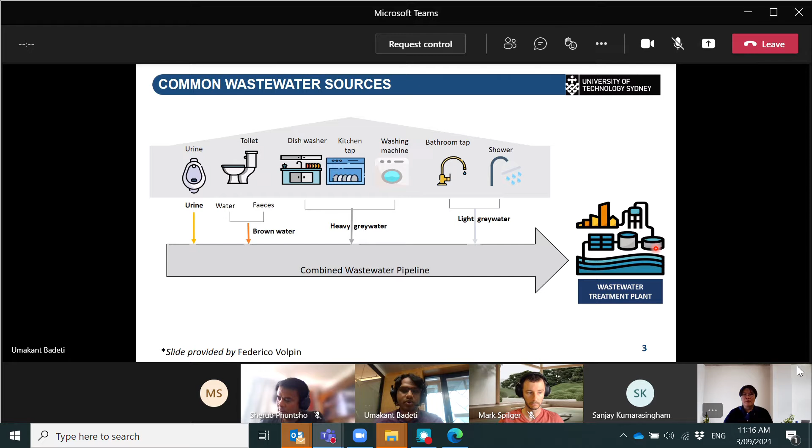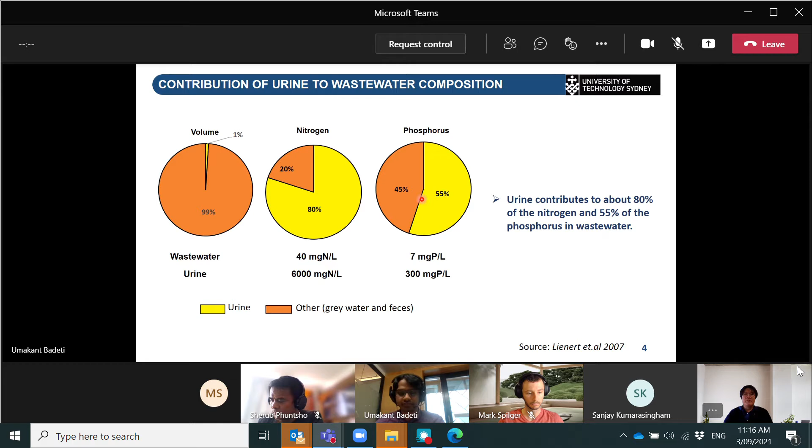When we look at the composition of wastewater, urine contributes about 1% of the whole wastewater volume. But this 1% of the volume contributes about 80% of the nitrogen and about 55% of the phosphorus in wastewater. In a traditional flow like Central Park, all these nutrients are carried to the wastewater treatment plant. The general treatment targets of the plant are to remove nitrogen, phosphorus, organics, and pathogens. However, some of the challenging parts of this process are nitrogen and phosphorus removal.

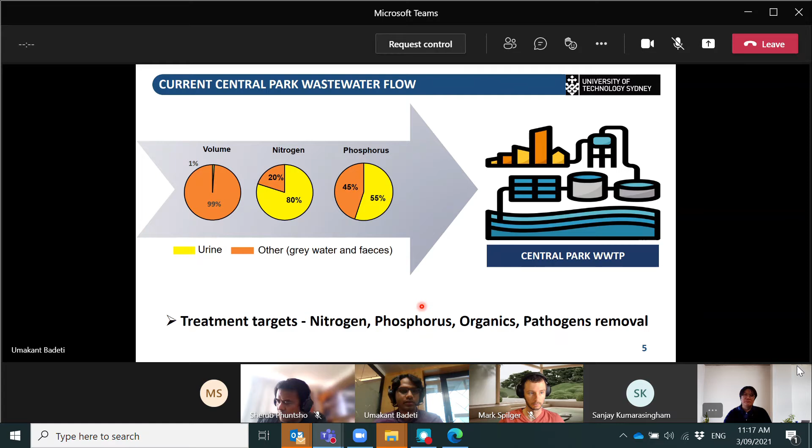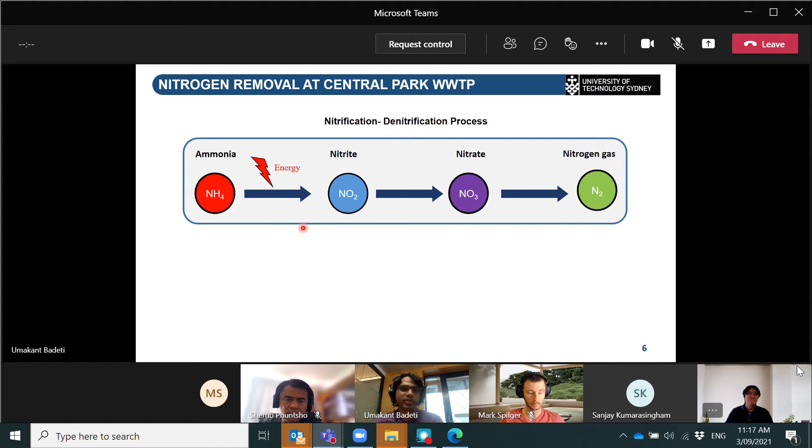At Central Park, nitrogen removal is carried out by nitrification and denitrification processes, where ammonia in the wastewater is nitrified to nitrite and nitrate, and then denitrified in the form of nitrogen gas. This process requires energy-intensive aeration, which consumes about 40 to 60% of total energy consumption. It also requires recirculation, which increases the space requirement of the plant. At the same time, it produces harmful greenhouse gas emissions like nitrous oxide.

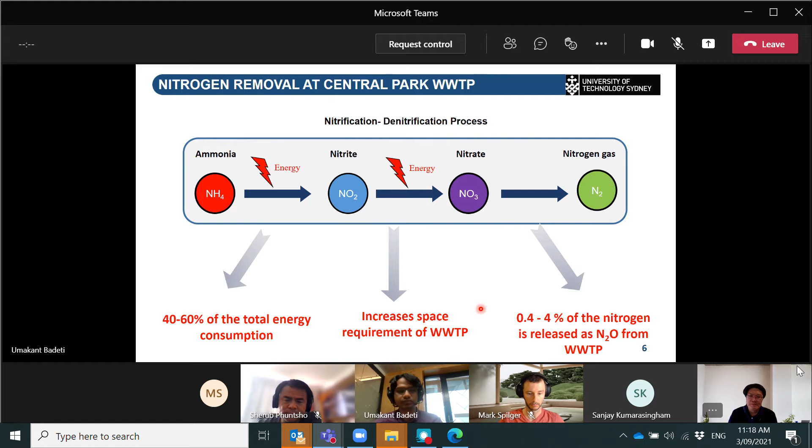Phosphorus removal at Central Park is carried out by chemical precipitation by alum dosing, which requires alum as a chemical input. According to my calculation, about $31,000 per year is spent just purchasing the chemicals for this process. The precipitated phosphorus is discharged to the Sydney Water sewage pipeline, which charges $6.7 per kilogram of phosphorus discharged. My estimates show that about $40,000 is spent on phosphorus discharge every year.

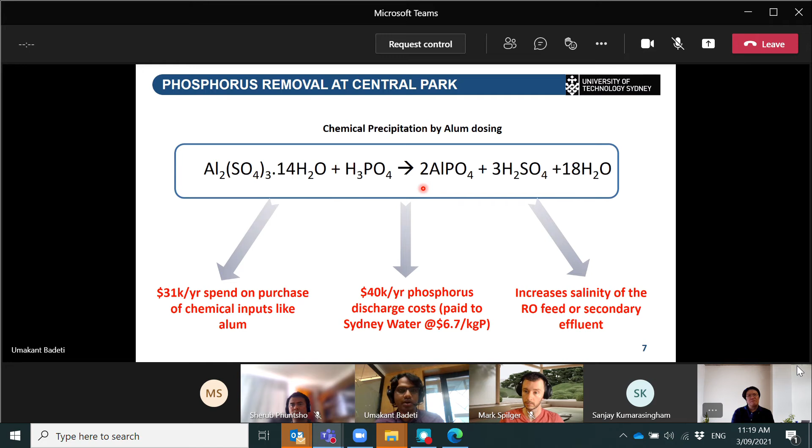Another challenge is that alum dosing increases the salinity of wastewater, which at a later stage impacts the performance of RO. So one way to address this that we are proposing is urine diversion, where at the source you remove a major part of nitrogen and phosphorus from wastewater, which can lead us towards sustainability.

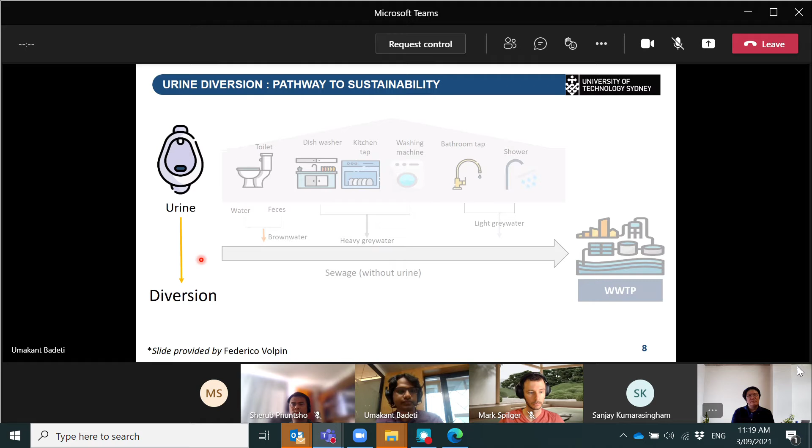We have proven at UTS that urine diversion is possible from male urinals. At UTS, we have a plumbing system which diverts urine from all the male toilets. A common pipeline takes all the male urine to the basement, and this urine is processed to be used as a fertilizer.

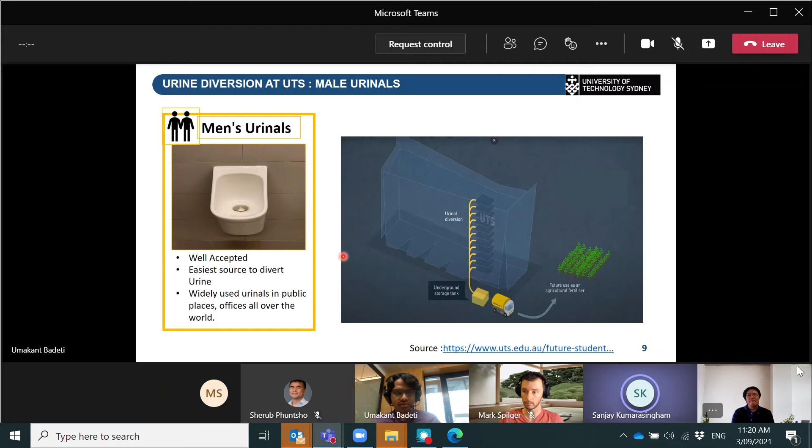Sorry, my presentation is stuck for some time. Okay, so

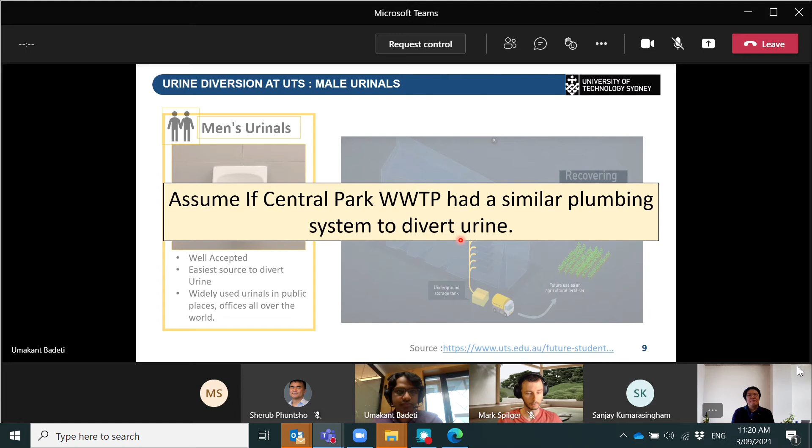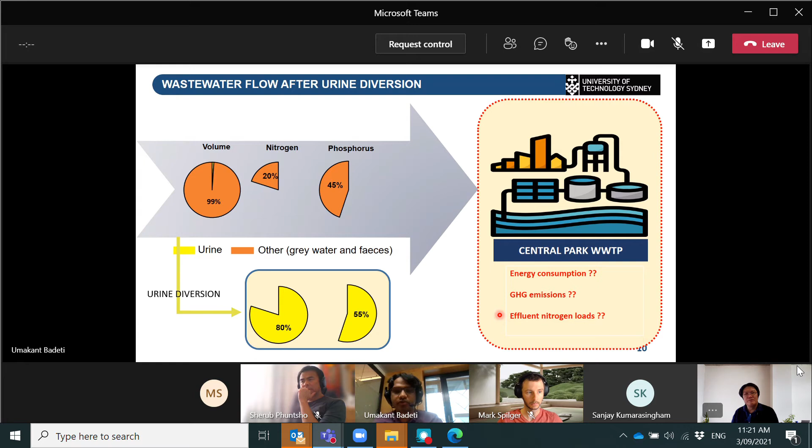Assume Central Park wastewater treatment plant had a similar plumbing system which could divert urine. We would remove a major part of nitrogen and phosphorus from wastewater, which is expected to significantly influence process performances of the plant, like energy consumption, greenhouse gas emissions, and effluent nitrogen loads. My work is focused on modeling this scenario and understanding how it can impact the performance of Central Park wastewater treatment plant.

We have carried out this work on BioWin modeling software, which is used by most water utilities in Australia to optimize treatment and study various treatment processes. Our model input was the Central Park wastewater treatment plant process. We configured it in BioWin, calibrated and validated the model, and the outputs were energy consumption, effluent water quality, and greenhouse gas emissions.

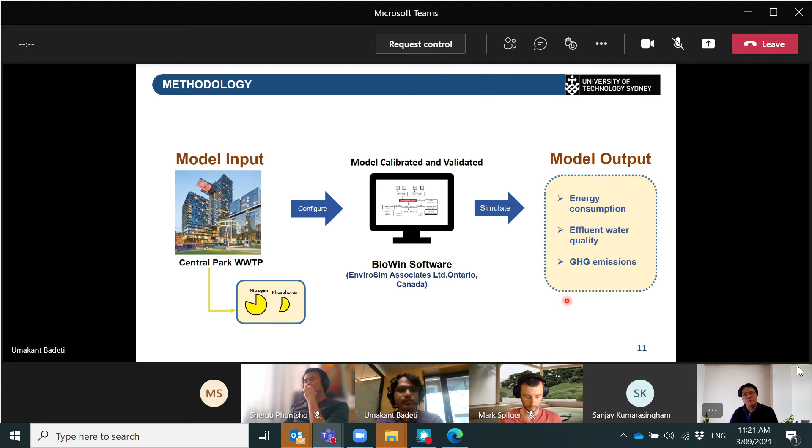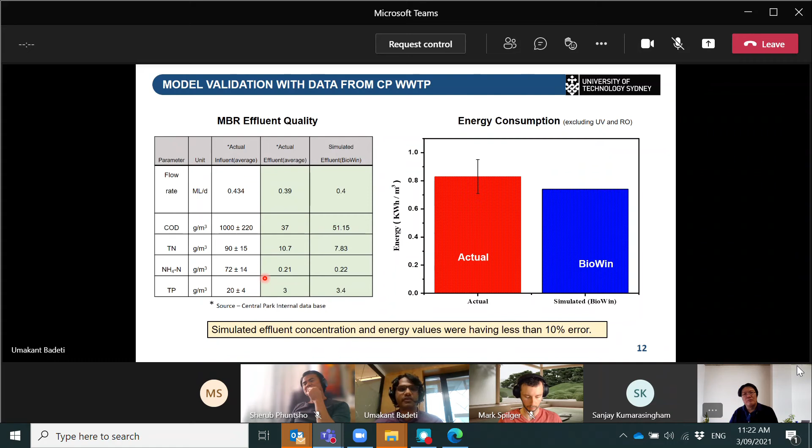First, we validated our model with real data from Central Park on effluent quality and energy consumption, and the modeling and real data were within less than 10% error. Our modeling studies revealed that by diverting about 90% of the urine, you can save up to 33% of your energy consumption, because you're not letting most of the nitrogen into the treatment plant, which saves a lot of aeration energy.

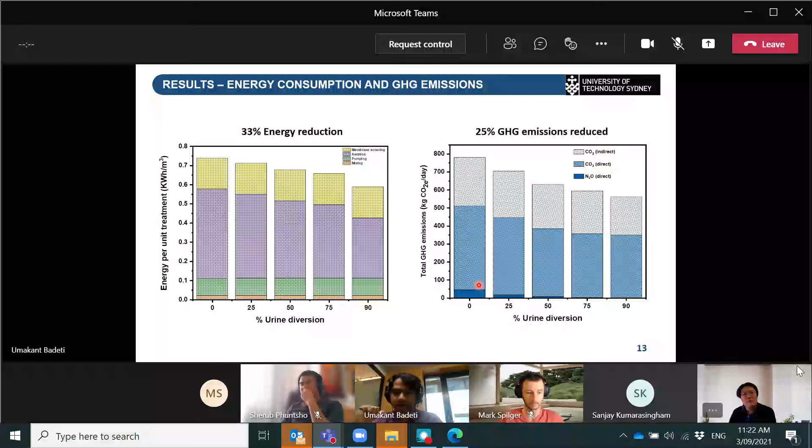At the same time, with 90% urine diversion, about 25% of greenhouse gas emissions are reduced because you are cutting down on nitrification and denitrification. We found that the effluent COD remained more or less the same until 90% urine diversion. But beyond that, nitrogen limiting conditions occur in the plant, which lead to a shoot up of COD for more than 90% urine diversion.

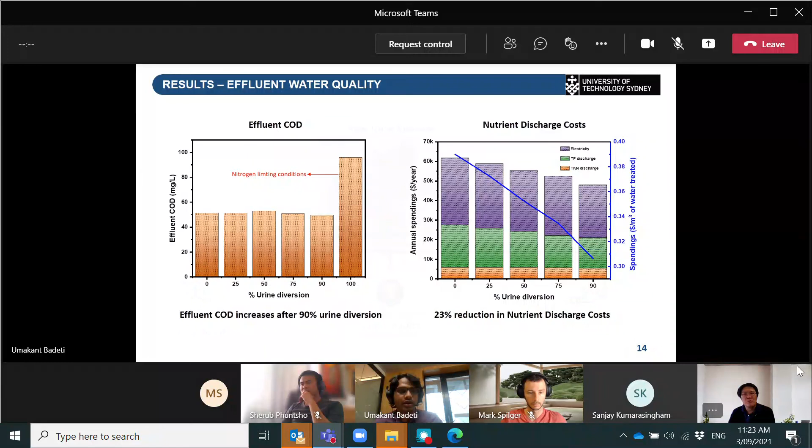We also found that by diverting urine, you reduce the discharge of nutrients into the Sydney Water sewer pipeline, which reduces nutrient discharge costs. Our calculations show that about 23% of your nutrient discharge costs can be reduced. So these are the results we have so far.

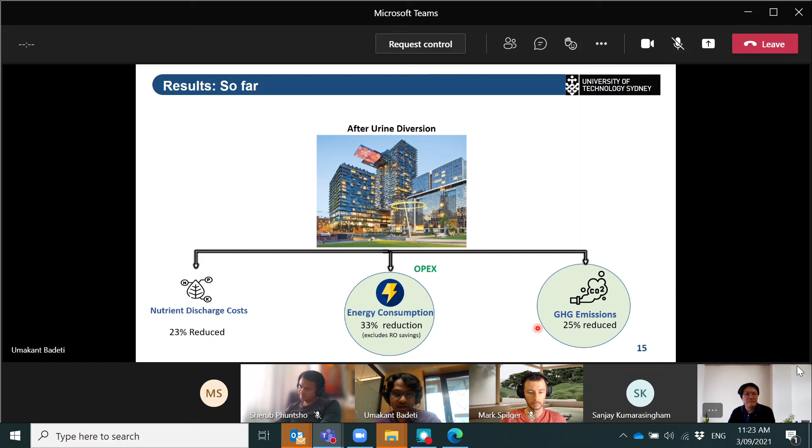To sum up, with urine diversion you can save 33% of your energy consumption, which impacts the OPEX costs of the treatment plant; 25% of greenhouse gas emissions, which impacts climate change; and 23% of your nutrient discharge costs, which affects operating costs and leads us towards a circular economy.

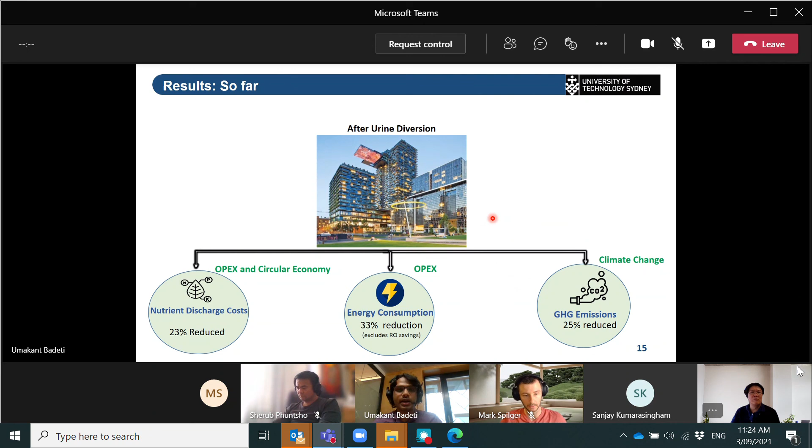These are some of the benefits we have investigated so far, and there are many more yet to be investigated. We are interested in investigating the effect of urine diversion on the plant footprint, capital costs, and treatment capacity of the plant, which can benefit the treatment plant significantly.